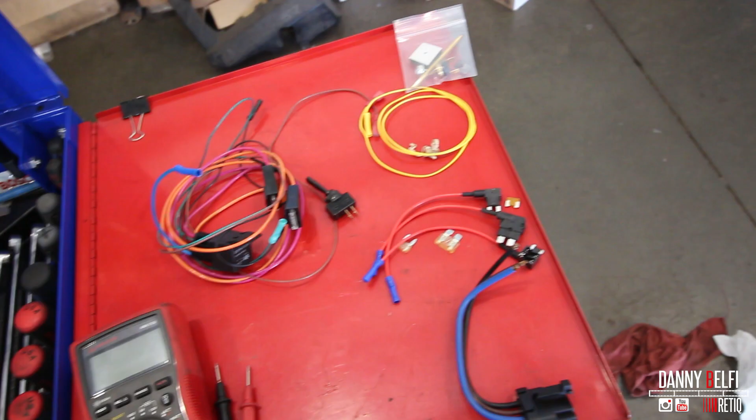Including, I got this fan controller for this thing.

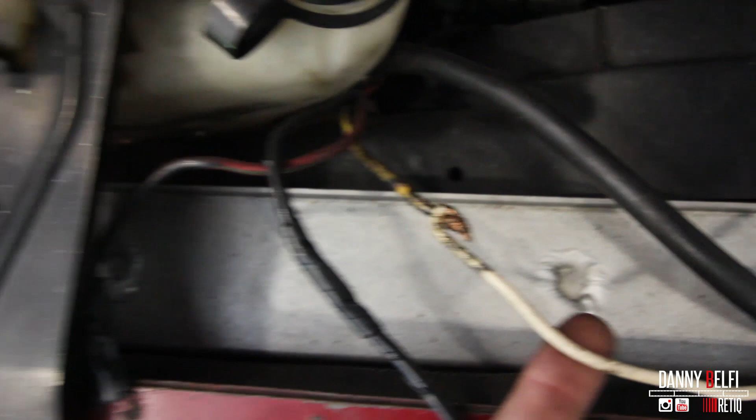This is the fan right now. I'm still going to run it on one speed, the low speed for now, and see how the car does. But this is just slid into a fuse, which isn't the greatest.

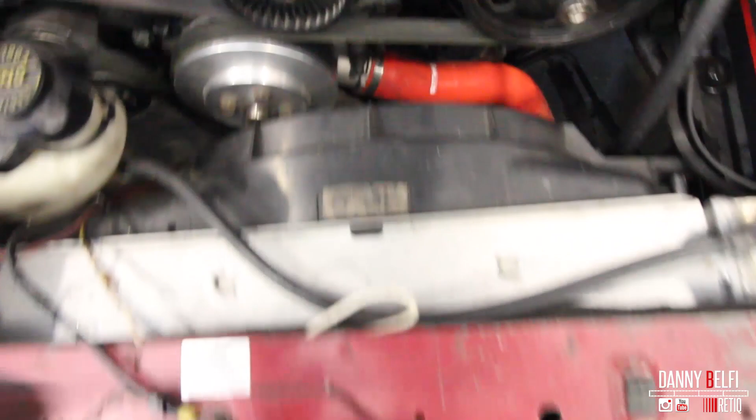There's no plug in there, so I'm going to mount it over there, run the sensor into here, and then the plug's over there. This is the new plug ground.

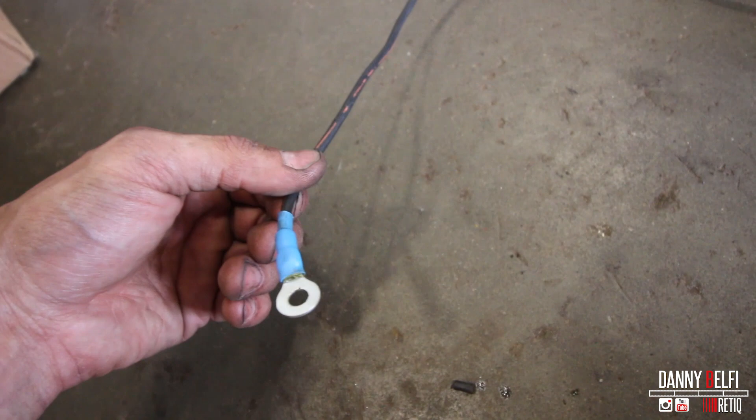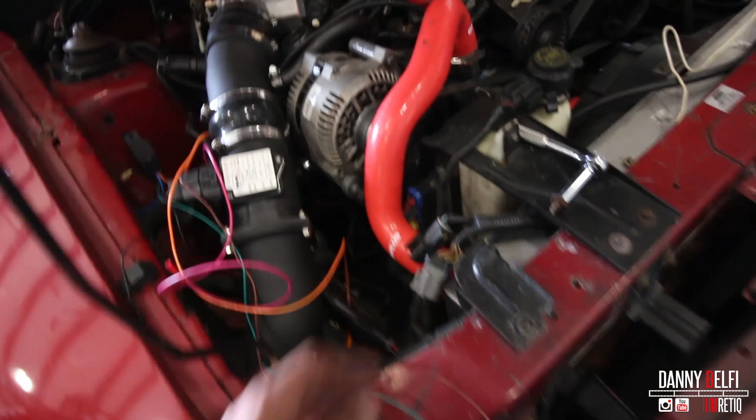Now I'm going to run the low speed fan off the orange fused wire.

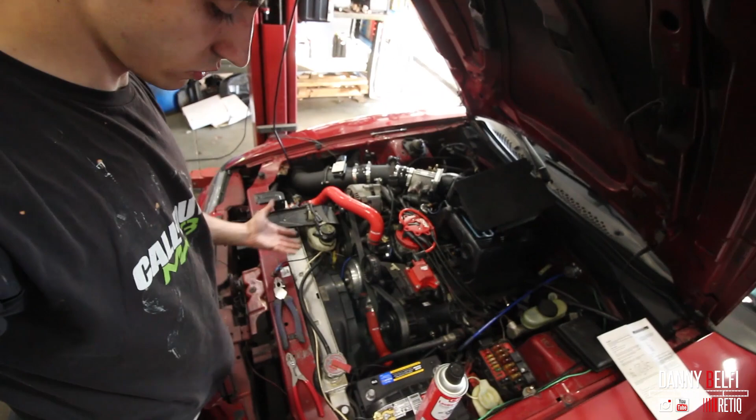Alright, we're here wiring and trying to make kind of a wiring harness, kind of, not really, because you can't really do that with the fact that there's only like 3 wires. But I'm trying to keep them neat and tucked away from everything.

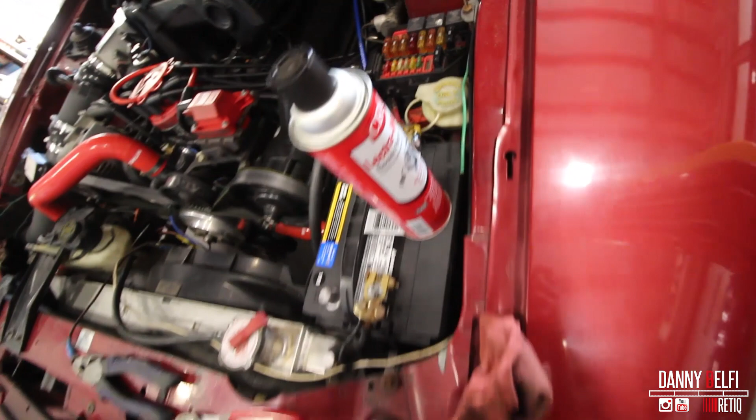This wire is just the constant power, and then I'm going to run another wire to this wire that's already been wired into the car, which is black, well actually it's going to be, I think, constant key-on ignition power.

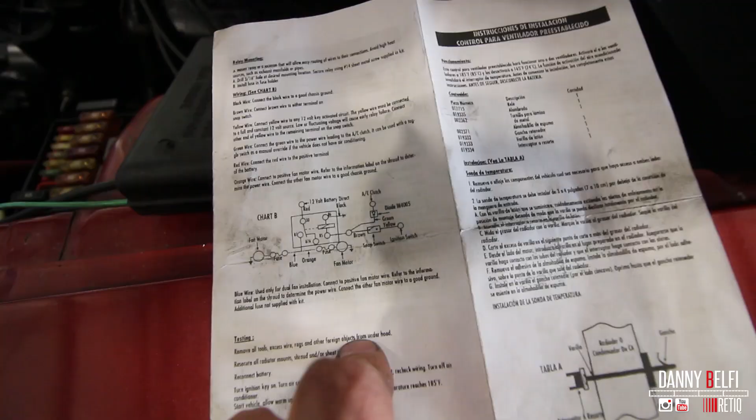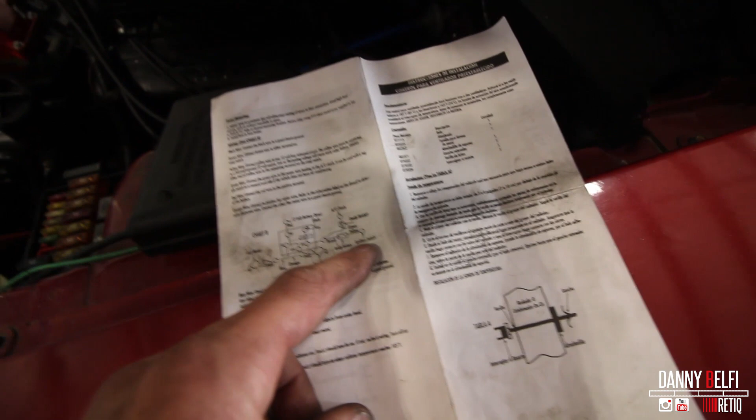So this green wire is going to be the other side of this snap switch into the ignition switch. I'm going to use a fuse buddy under the dash to a key-on source, which something was already plugged into.

So this black is going to be ground. Now instead of running it somewhere by itself, like over here, I'm going to run it with these other wires, which I'm running together. This one goes to the switch that goes into the radiator.

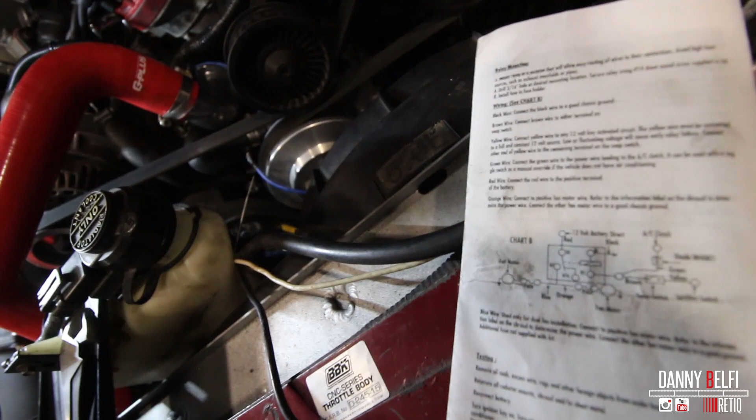Those 2 wires, one's the power wire that tees off up here with this ground. I'm going to run this ground over here, along with those wires, put it under here and wire loom it so it's like a little harness. This whole thing will be a little harness.

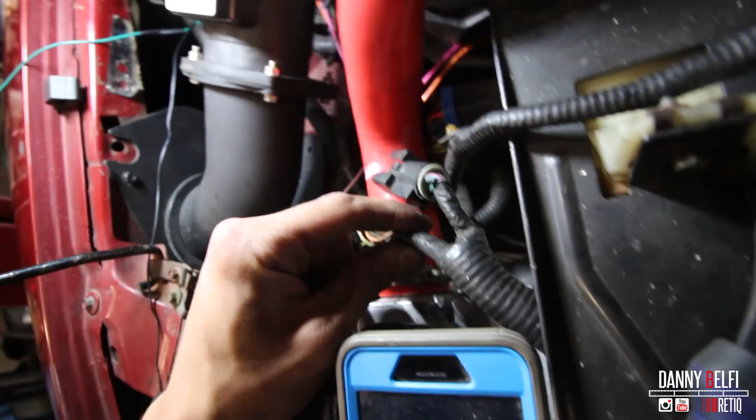I won't have just 100 little wires. They'll all be together nicely. Also not doing what the previous person who wired it did, just twisting the wires together and putting electrical tape. I'm using crimp connectors that are heat shrink.

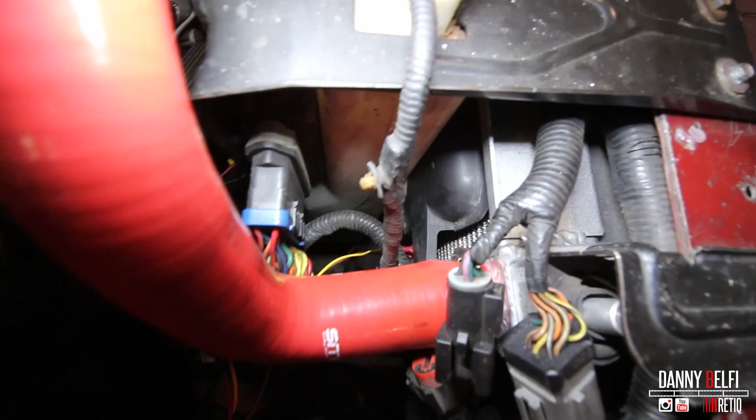Get bundled up, you see right there, they get wired up, and then I have to make a prettier looking T there because 2 wires go into there, and then the other wires come up.

That wire has to go in the car, and then 2 grounds. And then these 2, the white one is power all the time, and then this black wire is going to go where this green wire goes in the car.

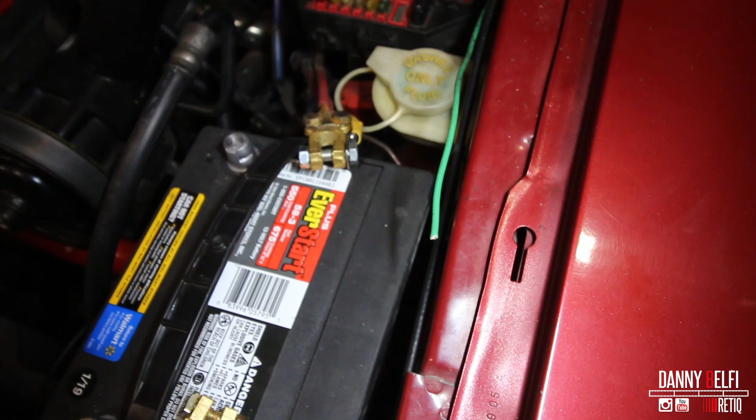This black wire is key-on only power, and then that green wire over there is going to have to connect to that green wire, or a smaller one I would like.

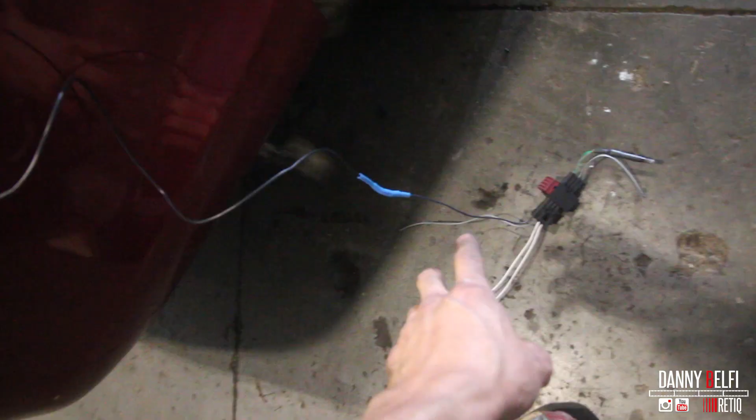So I got these maxi fuse things out of a Saab, some new wires and switches. Got a connector that runs up to here. I'm going to have 2 wires going into the car.

The first set of wire I'm going to pull like this through. Second wire, I'm going to wing it. Now I got this, then I got to figure out where the wires go from where to what. And then I'll put that over there for the high speed relay and fuse.

Yep, and I got the connector connected. Okay.

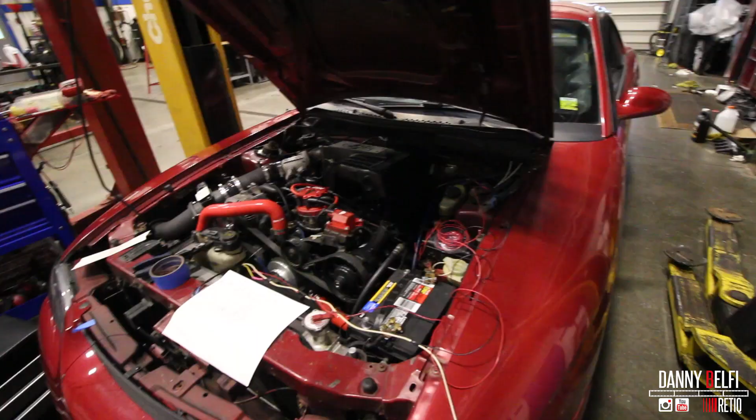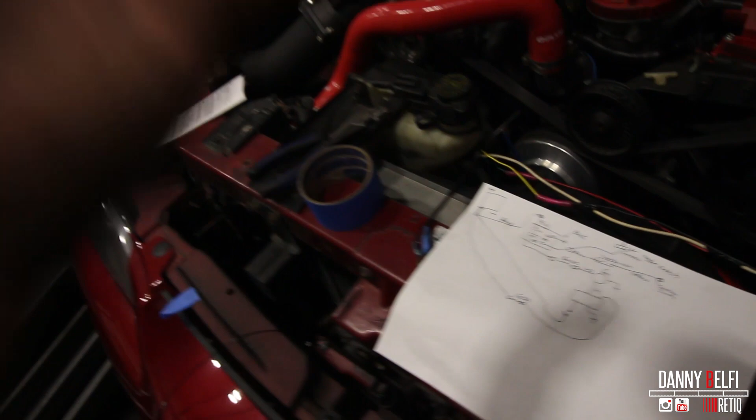I am going like crazy trying to set up the low speed fan and then have a toggle switch for the high speed fan. I'm just running all over the place. It's probably obvious, but I'm not very good at electrical.

I'm trying to use an already fabbed up Saab relay and fuse box to replace this, but the fuses are flipped and there's an extra fuse in there. I'm just trying to figure out the best way to wire it up, like take that and replace it with that.

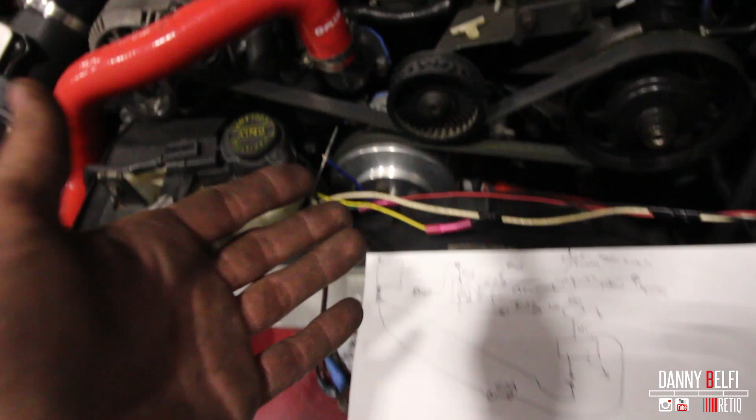But I have not figured it out yet, and I think I've just been running ragged on this, and I just need a break and come back to it another time and figure out how to wire in the new speed.

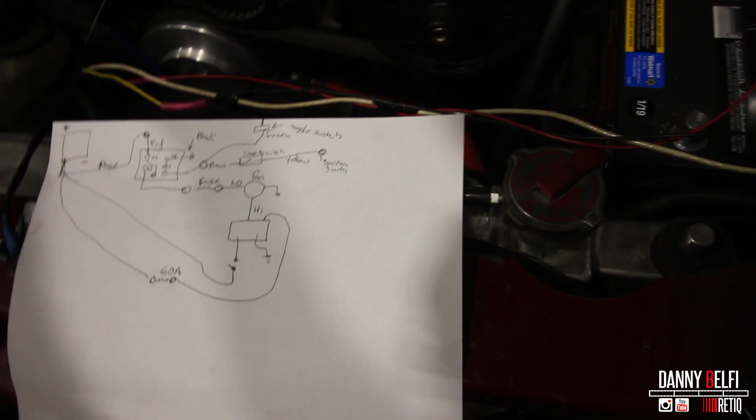I'm going to feed a wire through for the toggle switch for the low speed, and I'm not going to worry about wiring in the high speed toggle switch, since at least if I do it right the way it is right now, it'll run with the low speed fan, but it will not run with the high until I can figure out how to wire it all in with the new boxes.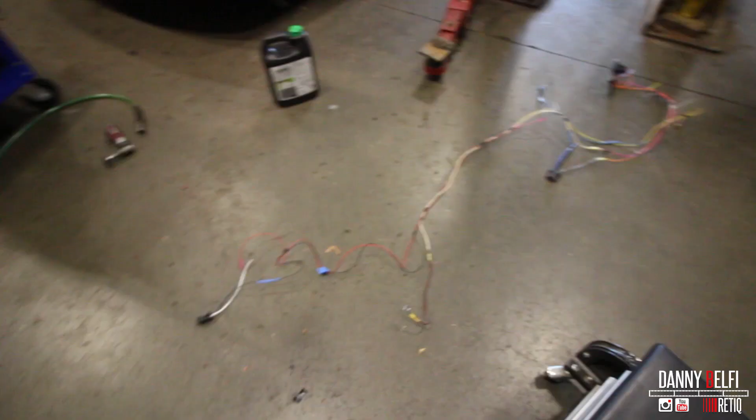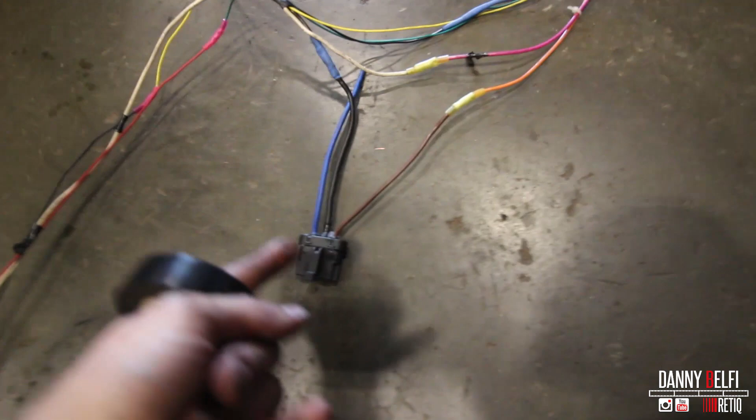Okay, I tried this in the car and it didn't work. I flipped the toggle switch, it didn't work. I found out that the way this wire from Rock Auto, the blue, I was confused, but you think black is ground. Black wasn't ground, black was like the low speed, and it was all mixed up.

I looked online and found out that the middle plug is ground, and the closest to the ground on the plug when it's in the fan is low speed, and the farthest is high speed.

So I had to depin it. I had to cut this one and re-put it back together, and now it's probably going to be too fucking short because these motherfuckers did this plug wrong. But I guess I should have checked, and that's my fault.

So I'll look over that next time. Now I'm just going to neaten it up.